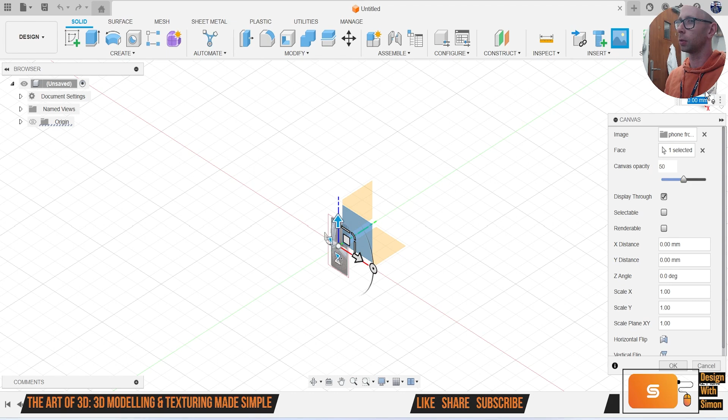First thing I'm going to do is bring in our reference images. If we click up to this button here that says Canvas, go to Insert from Computer, and on my desktop I've got my references. So I've got the front, looking on the front plane here, bring it into position. I'm not going to change sizes just yet, so I'm just going to bring it in and bring it up. Do the same again with the back, and then we'll do the same on the side.

Now what we want to do is make sure we've got those the right size, so I'm going to turn off those ones first. If I right click and calibrate, I click here to here, and I can put in what size it wants. All I've done is go on Google and typed in measurements, so I'm just going to put those in there. That needs to be 68mm.

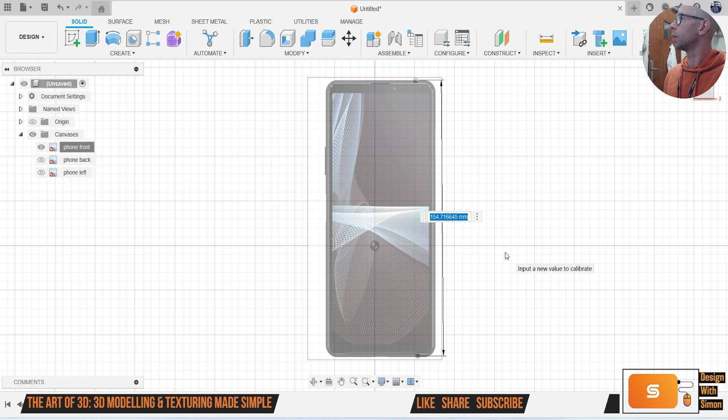And then same again, let's calibrate top and bottom, and that needs to be 156. Let's do the same on the side, so let's right click, calibrate. That's going to be 8mm thick, 8.4. So let's do 8.4. Enter.

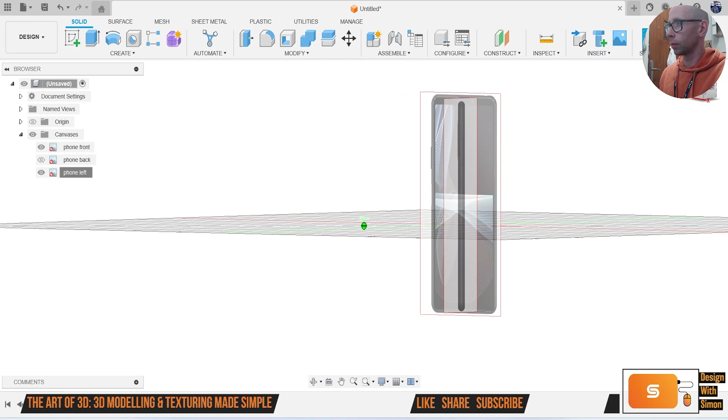And then bring that up into position. Let's right click, edit canvas, drag up. Let me change the height of that slightly, so let's right click, calibrate, top and bottom. Again that needs to be 156. And then we're going to bring this one up as well, and for this one, edit canvas, drag this one up to be exactly the same size.

Okay, so we've now got our canvases. I'm going to turn that one off for now. I'm going to give us a quick save.

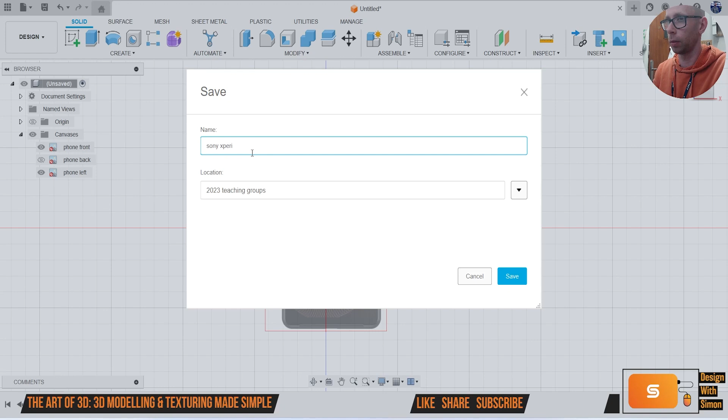Once I'm done with that, we're going to create a sketch on this front plane here, go to create and go to rectangle there, so we want a 2-point rectangle. Zoom in and just go to where that lines up, come down to the bottom, like that. Then finish sketch, hit E to extrude, or you can go to create and extrude there. So you see the keyboard shortcut E. Hit E, should highlight it. If it doesn't, you can just click on it like that, come to the side, and then we can drag that out.

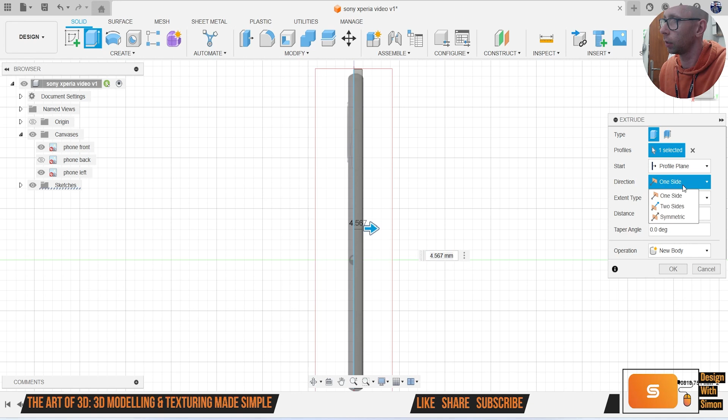And then let's do two-sided drag out like that, so we've now got our 3D rectangle. We're going to go to modify and fillet it, or keyboard shortcut F, and just grab these corners. If you hover over, I can actually see through those corners there. Come to the front again, just drag that in like that.

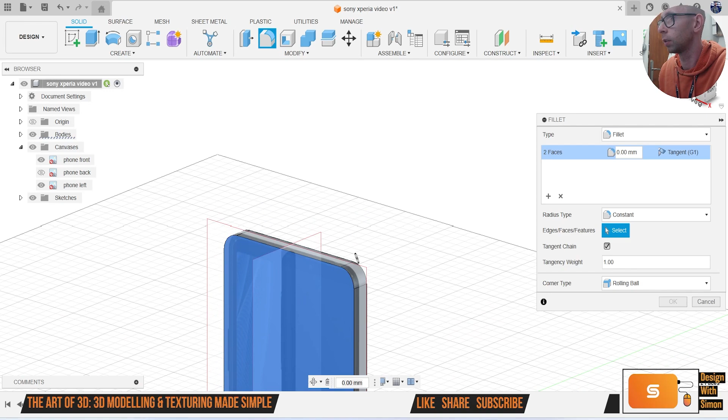And then let's fillet it. I'm going to grab that surface and that surface, then drag that in like that, just trying to keep in line with this bit here. Then enter. We've got the basic sort of shape done.

I'm going to turn off that side plane for now. So what I'm going to do is then start to put in these shapes, so we've got the little speaker section there. So let's turn the plane back on.

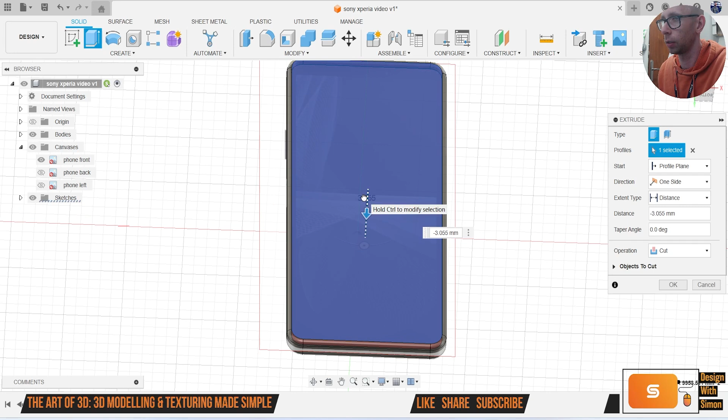Okay, first thing we're going to do though, let's hit E to extrude. I'm going to drag that down. Because when we texture it, we want to have another screen on the inside, so I'm going to click on that surface again, hit E, and I can drag up. But this time I'm going to go from join to new body. So now we've got two bodies there, so we've got the main body there, and this is the inside of our screen.

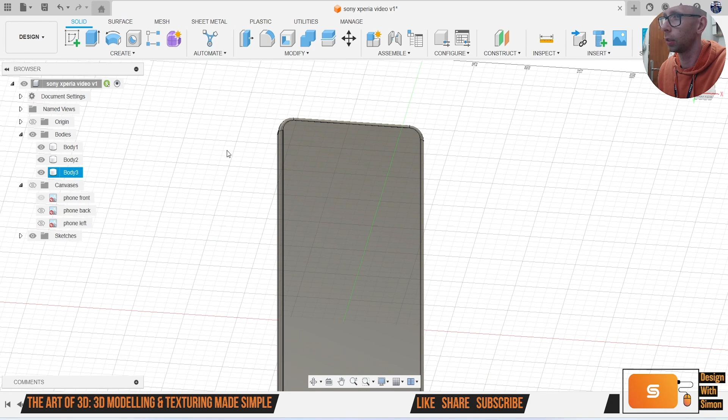I'm then going to do the same, hit E to extrude, and just drag up, zoom up until I get in line like that, and again go to new body. Now we've got three bodies. So I'll turn that off, you can have a look. We've got our main body there, and then we've got these two parts, because this will be where we put the actual image of the screen, and this will be our clear material, the actual texture of the screen as well. Let's now start putting some details in.

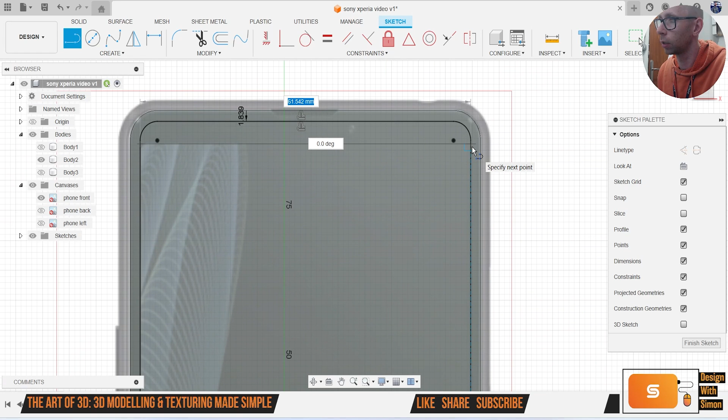We're going to turn that off and that off, so we're just working on the inside bit of the screen first of all. Let's create a sketch. I'm going to go to offset, select that and drag it in. Click OK, and I'm going to go arc line and just come straight across like that. Hit escape to get rid of the tool. T for trim, or modify and trim there. I'm going to trim these bits off. And I'm going to fillet it.

Now remember, fillet in sketching is slightly different to filleting when doing solid. So make sure you don't just hit F on your keyboard, because that'll finish your sketch and try and get you to fillet it as if it's a body, which we don't want.

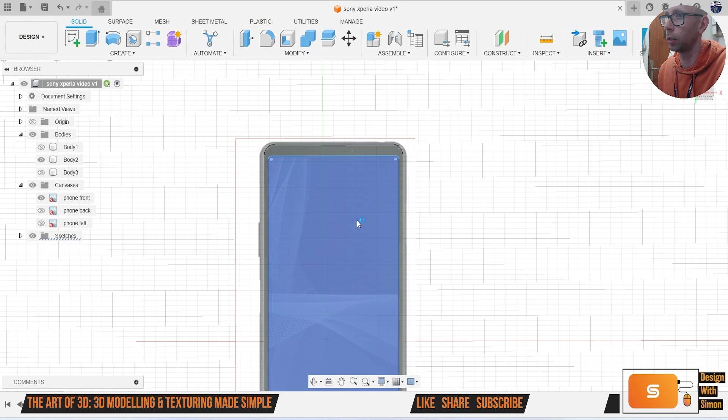Enter, finish sketch. So if we turn that off, and what we're going to do is cut that off. So you see, that's the inset bit where our screen is going to go.

And then we're going to get that back again. So we're going to grab that surface, hit E to extrude, and just click to there, but go to new body again. So now we've got the inside bit of our screen that's going to go on top of it, and then the outside case.

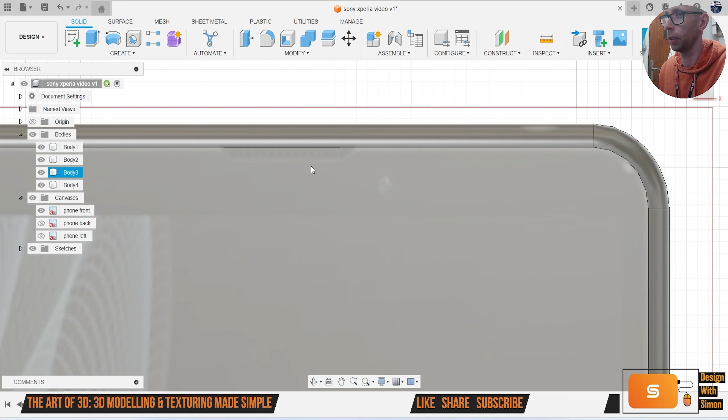So we've got all the different parts we need except for the buttons, and now we can start cutting some more details in. Let's start up here. Create a sketch, I'm going to click on the surface. Now remember, sketching will only let you start on a flat surface, so if you try and click on the filleted edges here, it won't work.

I'm going to hit L for line, come over to get in the middle. When that little triangle appears, I'm going to come down, and the reason why I'm doing that is just so I can mirror across, so I'm going to make sure it's symmetrical, which is what we want. Like that, and then I'm going to just put it just around these edges off slightly.

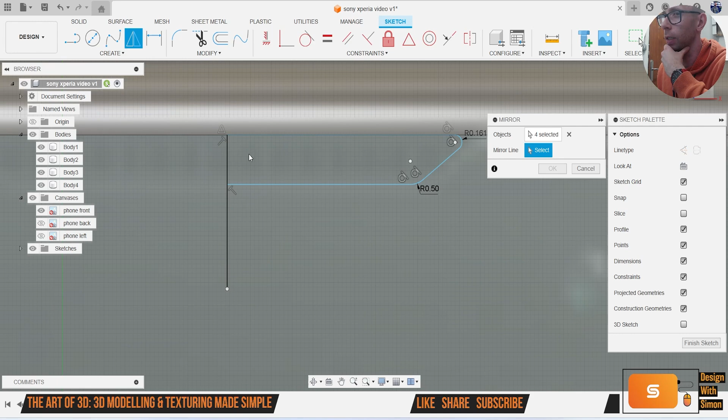Enter, and then we're going to mirror that across. Let's go to create and mirror, just double click. And then I'm going to deselect that line, because then I'm going to use that as the mirror line. Click OK.

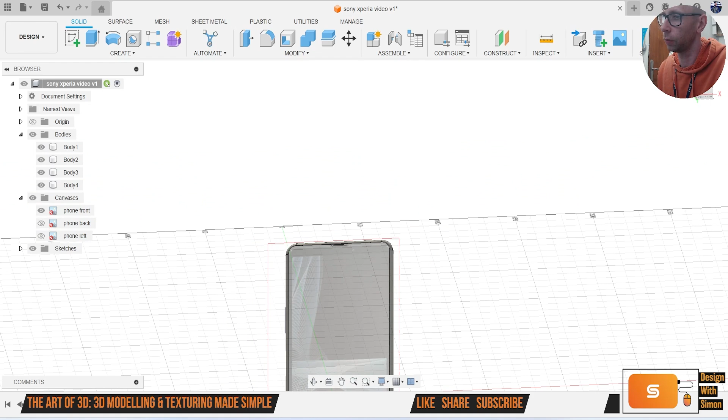So then I can hit E and grab that surface, I'm going to just drag it in, like that, and start to get some of those little details in. I'm going to hit F for fillet, so I can grab that, just 0.1 or something like that. But let's leave all the filleting to the end, so we're going to do everything, the details first, and then we'll fillet last.

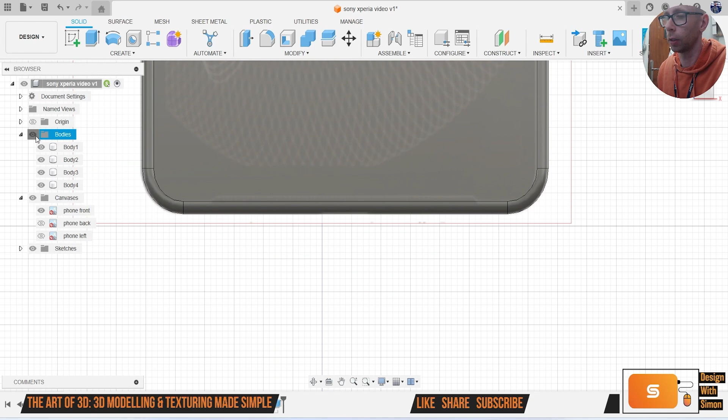Right, let's create sketch. I need a circle, go to create and circle there, I'm going to go center circle, and drag out, hit E for extrude. I'm going to turn that one off and just use that to cut through here like that. And then down at the bottom, turn this off, you see we've got this little detail here as well.

I'm going to create a sketch on the surface, and much like I did before, I'm going to hit L for line, find the middle, come up, now let's draw that across. Remember, if you've got a tool attached to your mouse and you can't get rid of it, just hit escape and it will get rid of it. And I'm just going to extend this line like that.

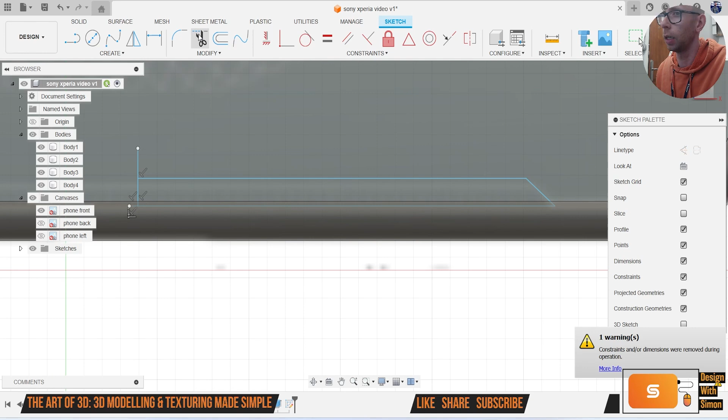Let's fillet those again, just so they're not really harsh lines. And then we're going to mirror that across, create mirror, we'll click line, like that. So again, you know it's a closed profile, we go over it in highlights, and hit E, select those profiles.

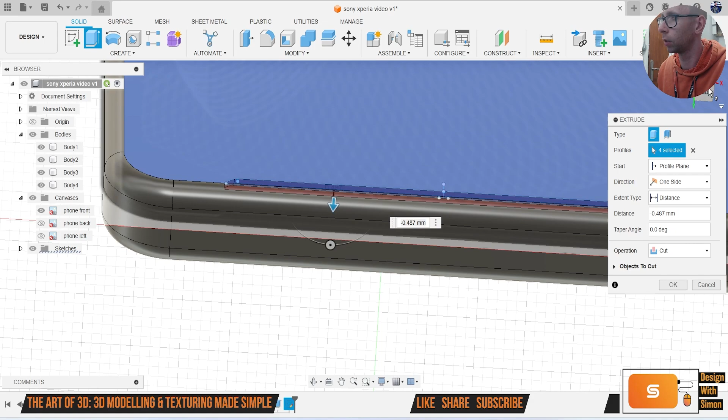Drag down. Just to make sure it goes all the way through, I'm going to do both ways. I'll just drag it up a little bit as well.

Okay, so that's most of the details on the front, because there isn't a huge amount to do on the front. So what we're going to do next, I'll make sure I've got these buttons on the right side. So we need to have, let me look at my image here.

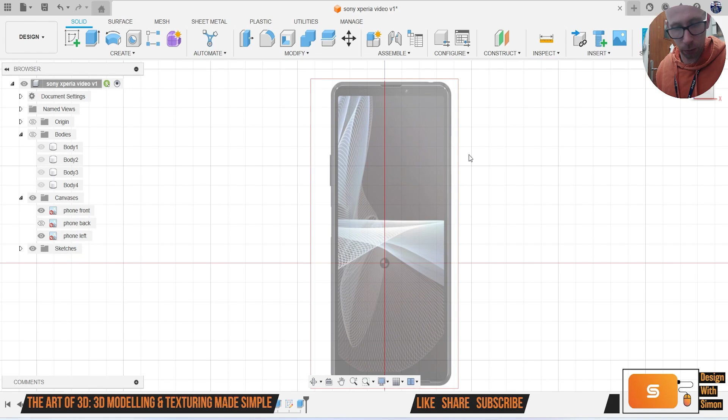Okay, so what we'll do is let's create an offset plane. So what we want to do is come here, click on offset plane, or construct offset plane, click on this plane here and just drag out, start sketch. I'm just turning off those bodies by clicking my eyeball just so I can see a bit clearer.

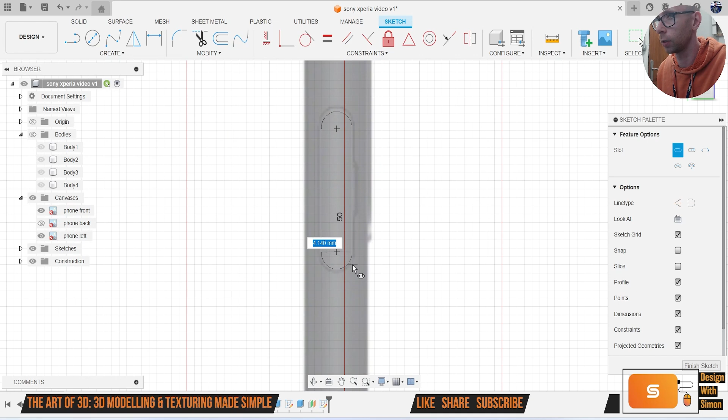And here I'm going to go to create, let's go to slot and center slot, just click and drag. And let's cut this little groove in as well. And let's mirror that across. In fact, first of all, let's just trim that bit. No, not yet, let's not do that just yet. Let's fillet this first.

Right, now let's mirror.

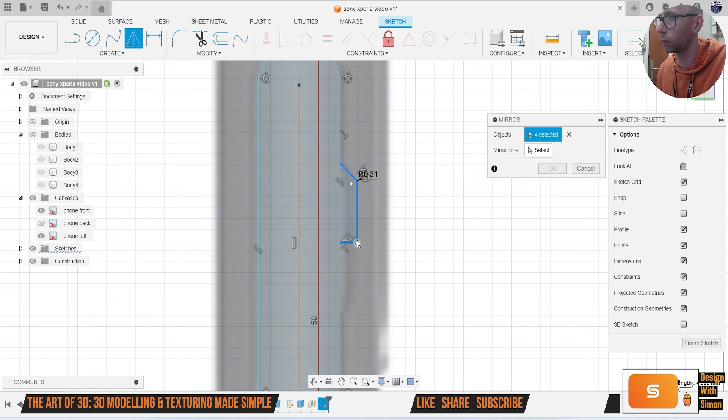Select that line, hit T on the keyboard for trim, and trim it away. Then I'm going to fillet just to soften those edges a little bit. Okay, so we've now got that done on this side.

I'm going to turn on those bodies again. Just sketch, and you see that sketch is hanging out over here. I'm going to hit E to extrude. Actually, before that, turn that off so we see what's going on. I'll turn off everything except the main body, then hit Control C, Control V so I've got an extra copy of it.

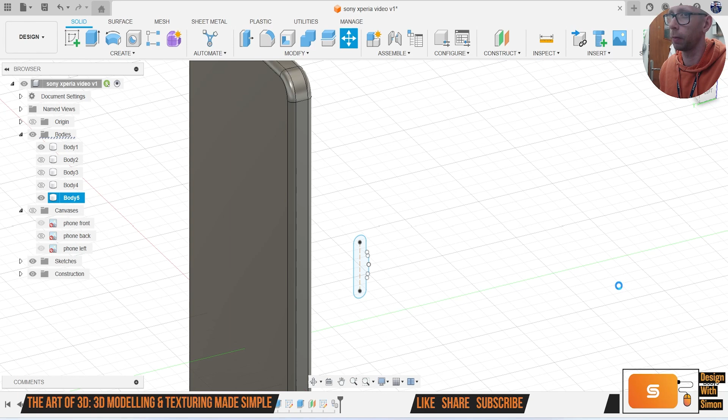Turn that off, hit E to extrude, take that and drag it through. It's going to start cutting, but under here it says cut, so you've got join, cut, intersect. If I go to intersect, it's going to leave me with that bit, so we could click OK with that instead.

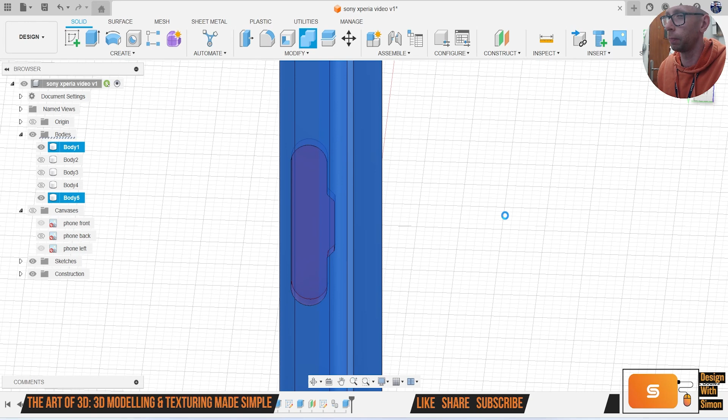Then if I turn back on this body here, I can go to combine, target body this body, tool body. I'll use that, say cut, but make sure you've got keep tool selected. So now it's cut that hole out and we've got that button.

So now what we should be able to do, hopefully, is add a little fillet onto that. I'm going to grab that and let's do like a 0.2. So we've now got that there.

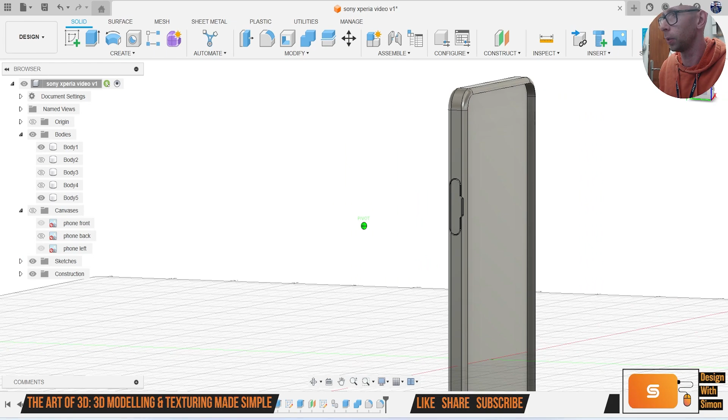Then on this side we do the same sort of thing, we've got a few different buttons, so things like the volume and screen capture or screenshot button or lock button. Now, annoyingly, because I haven't got both sides, I've got the left-hand side and not the right-hand side because I couldn't get it, but that's not a problem.

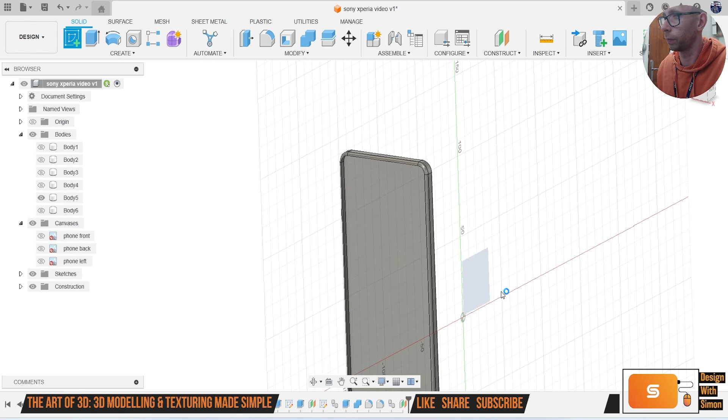Let's just bring this one back. Same thing, Control C, Control V, so we've got another copy of it, and just hide one. Offset plane again, and drag out a little bit. Create sketch, and we'll do the same sort of thing. So we've got...

It doesn't matter if we're not exact with everything, but we're going to create a slot, center to center slot. One thing we can do, I'm going to hit escape so I can hit P for project. If I select this one, bodies, select the whole thing, turn the body off, you see it's done an outline so you can see where it's going a bit better. Now that I've done that, let's go to slot, center slot.

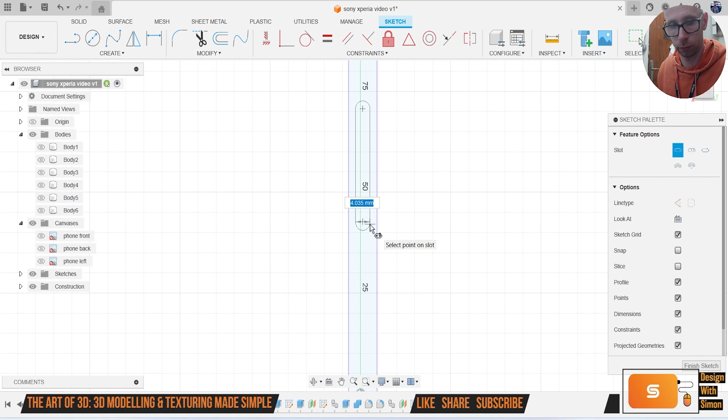And then let's add in a couple of these little details. Just make sure we're in the center. Well actually, let's make that a bit shorter. Right click and you can repeat your last command.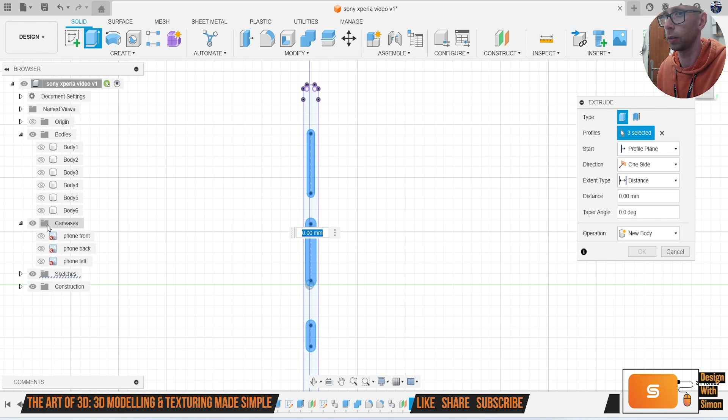Okay, finish sketch. Hit E and I can just grab these profiles, turn on that body, and again I'm going to drag through. And again, let's go to intersect. We'll just drag it like that.

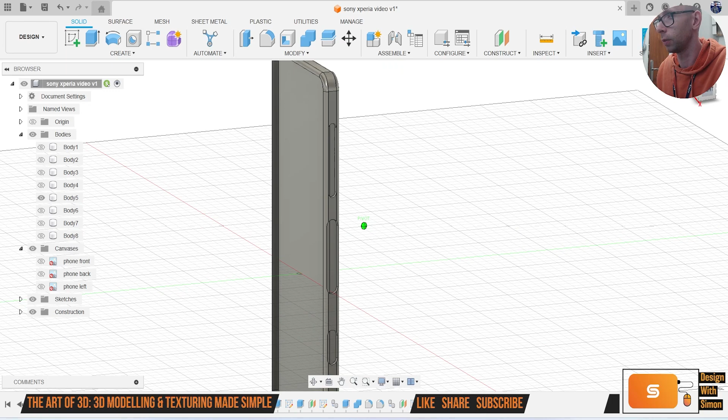And then we can bring back the main body. Sorry, combine again, target body this one, tool body, grab these three, cut and keep tools. Then if we turn those off, you can see that we've got those little details cut in.

And then let's fillet these. Hold control and you can do multiple fillets at the same time. Let's try a bit bigger. How's that look? Like .3, okay, goes back, fillet. I'm using the keyboard shortcut F to do that.

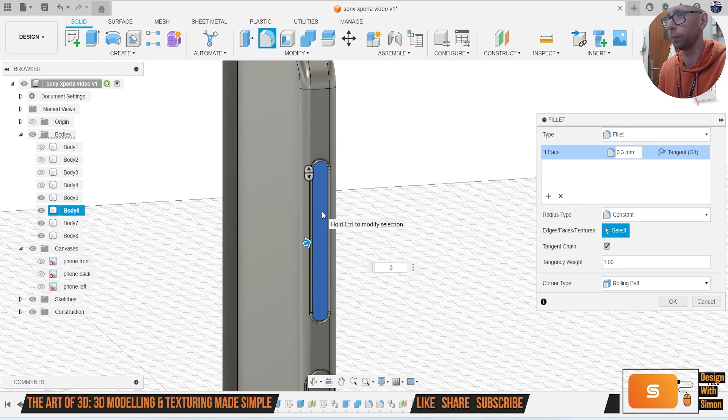Okay, and this one here, what we're going to do is create a sketch. Hit L for line and just find the middle, because this is the volume one. I'll hit escape and hit L again and come to the middle where it does a little triangle, like that. I'm going to do R for rectangle, center rectangle, just draw out, and then trim.

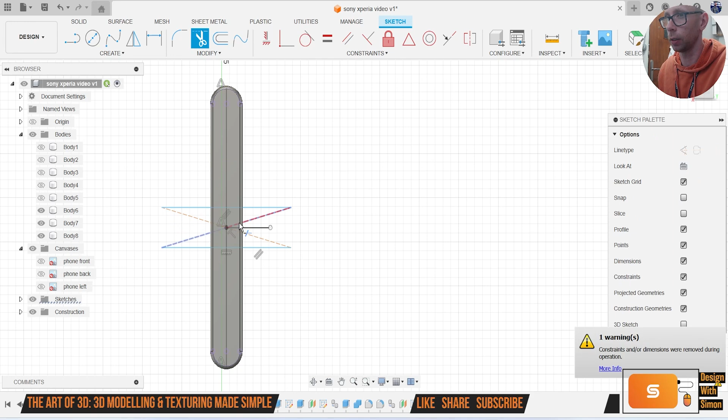The whole point of doing this is just so I can get those two lines, because what I'm going to do is split body, select those two, and I can just remove that bit. F for fillet, and that was a 0.3.

Right click and remove that one. So now we've got the volume section there. And then just having a look... okay.

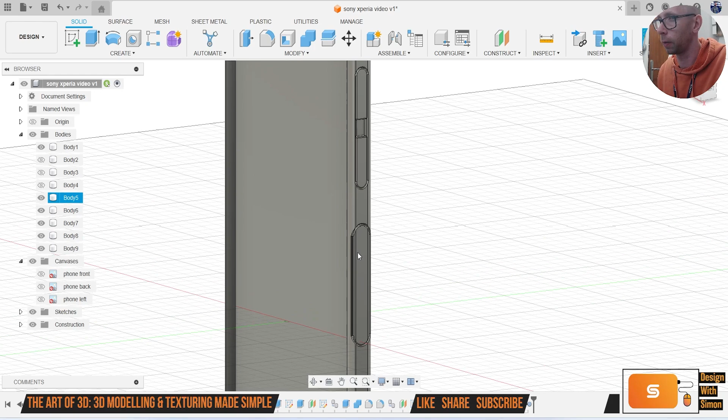So really, the last thing to do now, bring those back, is the camera at the back. I'm going to take my phone out of the case so I can have a proper look at it, but I've got reference images as well. So we just want, I don't know if I can see on the camera, put those there. Let's bring our back reference image.

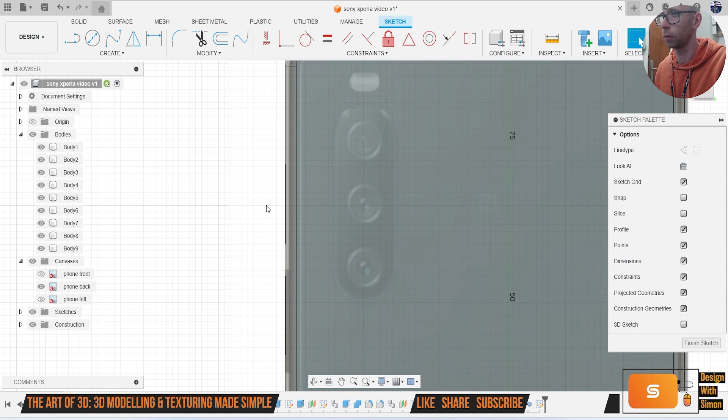And what we're going to do is create a sketch. Again, let's use that slot, center to center slot. Drag, it's a bit off again. Yep, something like that. Hit E. Now it doesn't come out very far.

Let's just drag it out a little bit. Let's do like... probably too much, hit 5. I'm going to go to new body. And then let's draw those lenses. I'm going to do C for circle, make sure I find the middle.

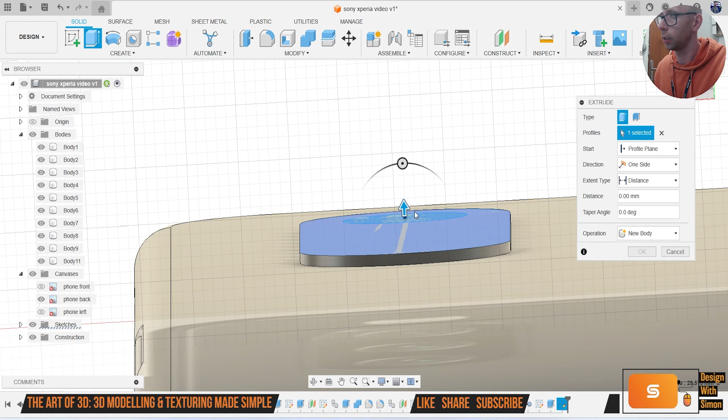E to extrude. So once you find that you're using the keyboard shortcuts a bit more, you find that it goes a little quicker. I'm actually going to turn off that body now so it doesn't get in the way. Drag it out. In fact, I'll right click and isolate just so that's the only one we're working on.

We're going to create a sketch, grab that surface, E to extrude, just drag that all the way down, but make it a new body. And then I'm going to fillet this as we're going along. Let's do like a 0.2, and start to get that separation.

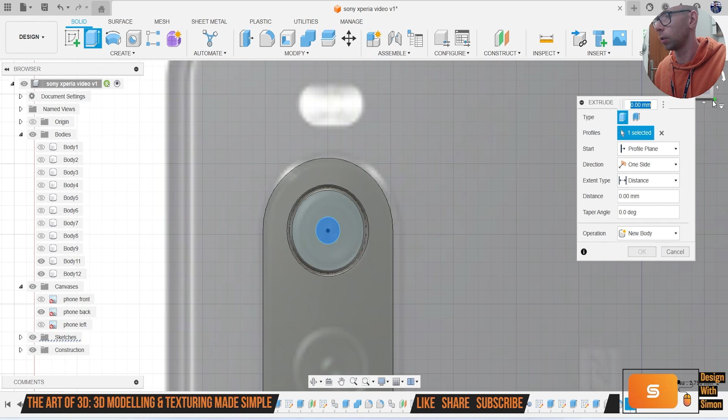And then we'll do one more circle and come into the middle. Start a sketch and then come to circle. E to extrude, drag that down, much like I did before. Create a sketch, finish sketch, just so I can hit E to extrude and grab that circle there. Rotate it around, just go to the back. Again, make sure it's a new body.

Fillet, we did 0.2. Fillet, 0.2. Okay, so we've now got our lenses, and what we want to do - hopefully this will work, but it doesn't always work - let's go to create pattern and rectangular pattern.

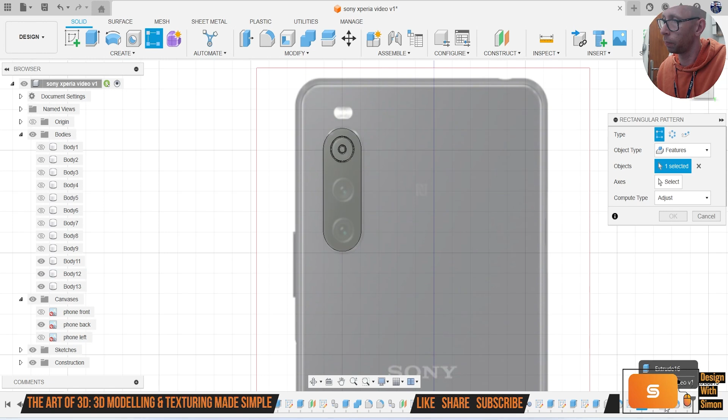Change up the features and let's grab these features. I'll grab this here. Okay, we want some more of those features. We probably want - drag that down - we don't want that one. We want these as well.

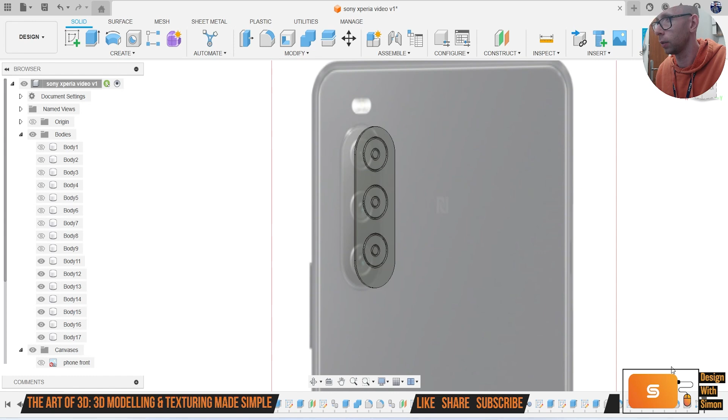Now it doesn't line up quite right, so we can go back and edit that feature and just drag it down a bit more. Click OK. And rather than have to do that three separate times, I turn my canvas off. Then it'll individually roll for us, which is exactly what we want. Hit F for fillet, and let's do like a 0.2 again. So we've now got our camera.

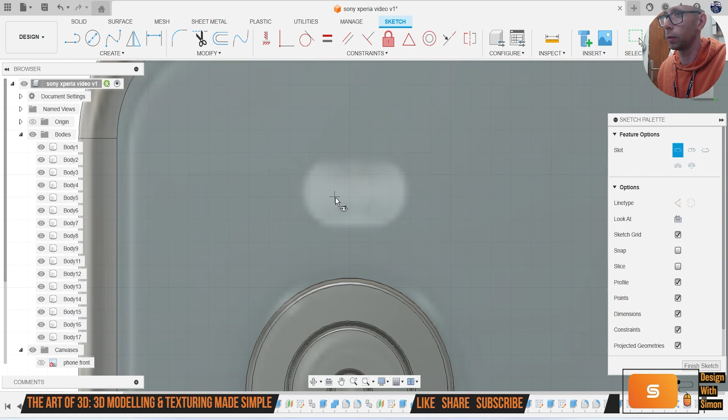We then want our flash, which is quite a simple one. So we're going to sketch on this back part here. Just here, create, and let's go for a slot as well. Drag across, hit E to extrude, just drag that in a little bit.

I'm then going to hit E to extrude, come back up, go to new body, fillet that edge, fillet. There we go. So those details are done.

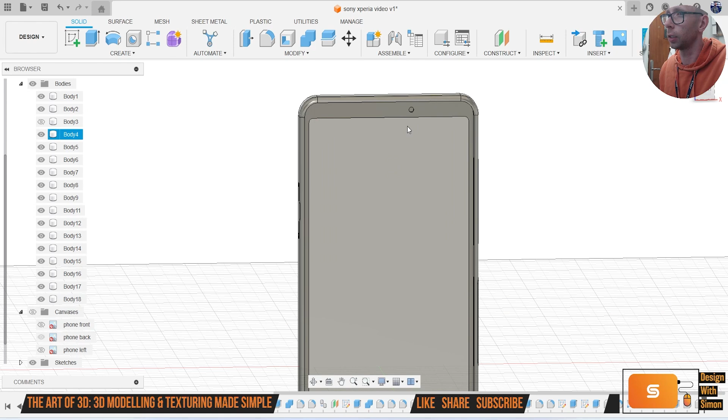So let's just turn the canvas off. So we've got everything on the front, remembering that underneath we've got - hide that one - we've got our details of our screen that you'll then be able to see. We will fillet all the edges; I need to make sure I don't forget to do that. I do want to make sure as well we do things like the jack and the charging port.

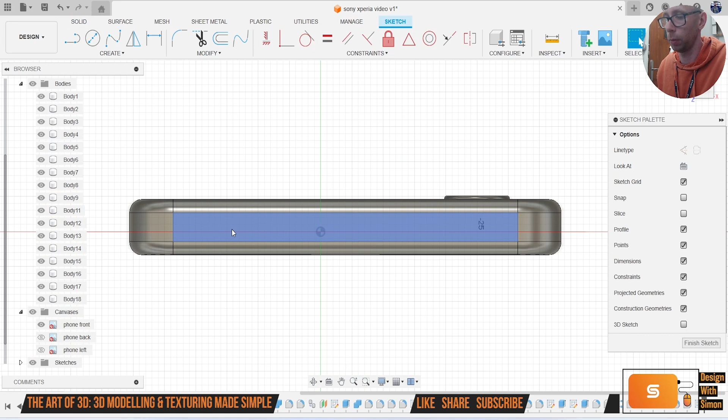So let's turn canvas on. So if I turn all the bodies off, it is on this side because I need to have it mirrored over. Yeah, so I'm going to create a sketch on that plane. Remember, you need a flat plane to be able to do it. And hit C for circle, right in the middle, and it comes out something like that.

And hit E to extrude, drag that down like that. Turn that canvas off - canvases can get in the way a little bit sometimes. Going to hit F for fillet.

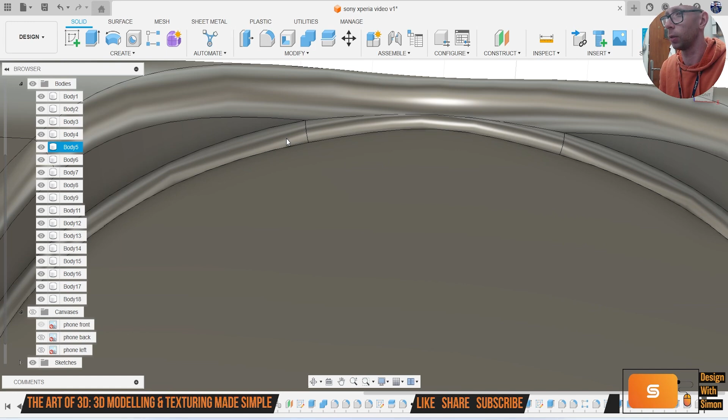You will find as well sometimes that your fillets don't always work. Tends to be so - the reason that one didn't work, I'm assuming, is because it would have broken that surface. So this one might not... oh no, it did work. Okay, and then if you look at that, create a sketch, circle.

E to extrude. Let's drag that down. So we've got that, and then down at the bottom we've then got another slot, which is essentially where our charging port is.

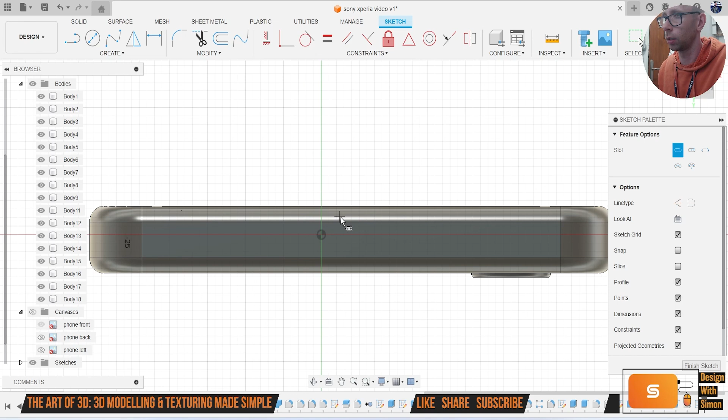So let's create a sketch, create, let's go to slot again, center slot, and middle, then we can come down. In fact, what we're going to do is use P for project to grab that whole body, L for line, so we can find the middle perfectly. Come up, L for line, so we can find that middle perfectly, like that, so that crosses directly in the middle.

And let's do the slot. So, not a massive one, just something. Something best - let's trim that off, and let's call that 4. And then what we'll do is slot, center slot. Well, just do that to 8. Come out.

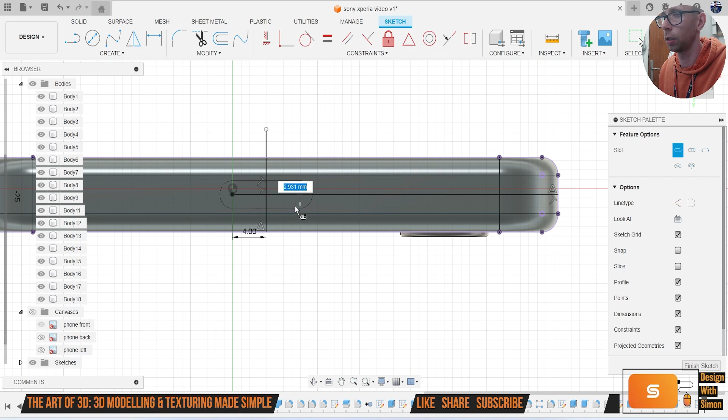E to extrude, drag up, F for fillet. And then let's hit E to extrude, drag that down a bit more. A little bit too much - let's bring that back a little bit.

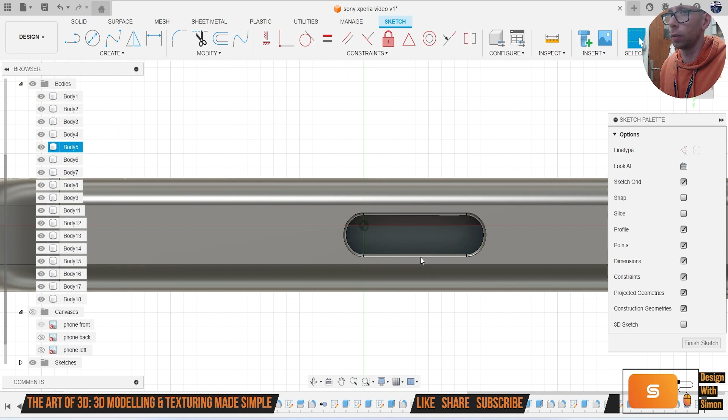And then let's just... let's delete that one. So delete, create sketch. L for line to find the middle. R for rectangle, and grab center rectangle.

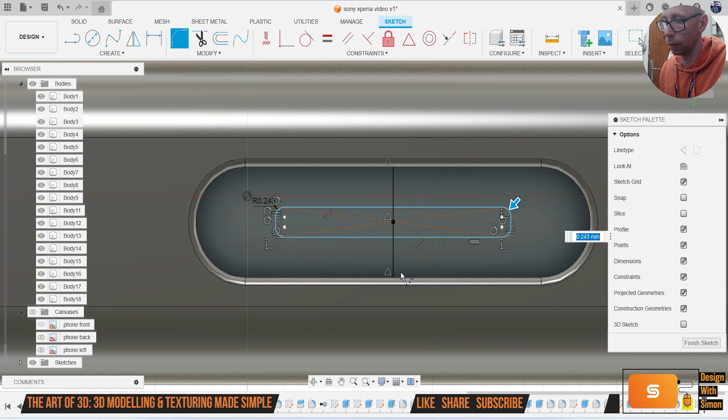Fillet all these sides. I hit E, drag that up, and I'm going to change that to new body.

Hit F for fillet, do like a 0.2, 2, like that. The modeling side of things is done. So the last thing to do before we start texturing it is go around and add some fillets to edges to make it a bit more rounded, because in reality nothing should have that really sharp sort of edge to it. So let's go to F, fillet.

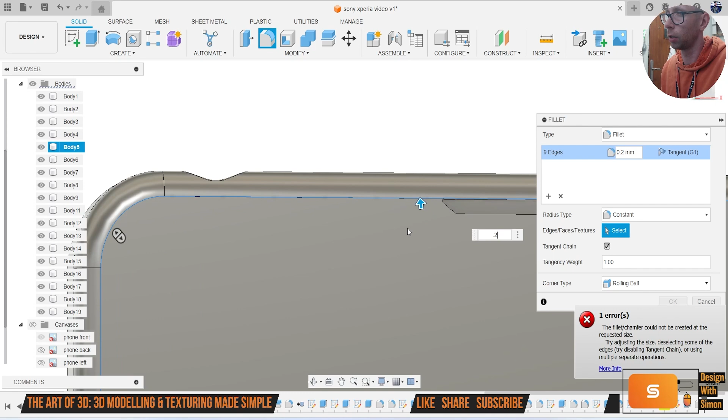And if you hold down control, it'll let you do multiple fillets like that. Just making sure we're going all the way around.

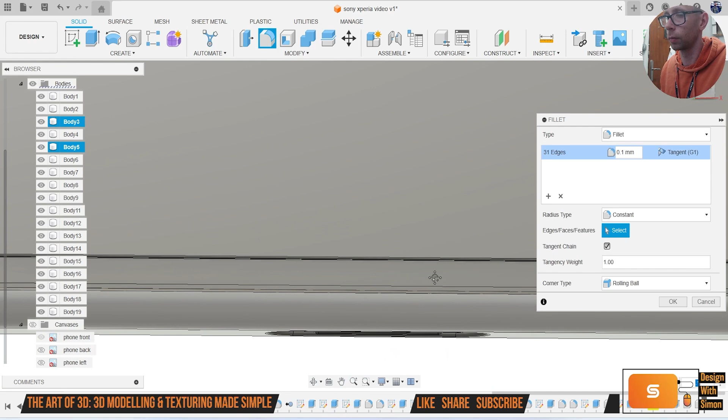That bit is done, so I'm going to take that away. I think we'll just fillet this slightly as well.

Again, you can quickly just hit F on your keyboard for fillet. With these fillets, I'm not being specific with what it needs to be, just what I think looks right. Don't worry if your fillet ends up being a slightly different size.

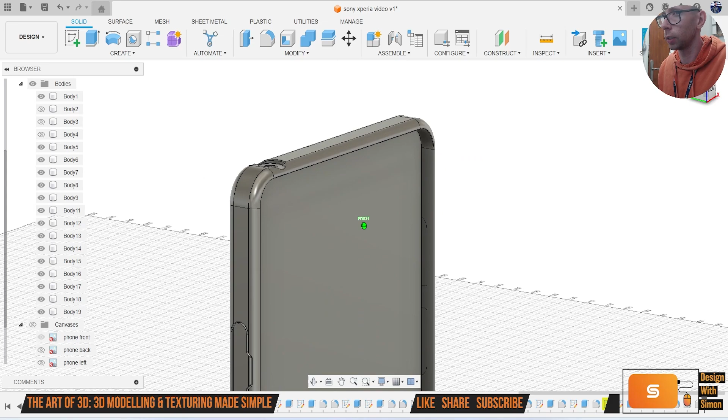That is fine. I'm just turning off these bodies when I'm done with them, so I can check fillets everywhere else. And I'm pretty sure I did it everywhere else as I was going, because these have all got fillets. So if I bring everything back, right.

Before we go on to texturing it, which we're going to jump into Blender to do, all I've made sure of is that every part I want to texture is a different body. That's the key thing here, and then I've got those fillets on there as well, because when we want to texture it, it makes it a lot easier to assign materials to those different bodies. Which is why when you go into extrude and it has join, make sure you change it to new body.

So the last thing I'm going to do is give this a quick save, click OK, and then go to File, Export, change that to FBX, and leave it on my desktop so I can find it easily. Then click on Save and Export.

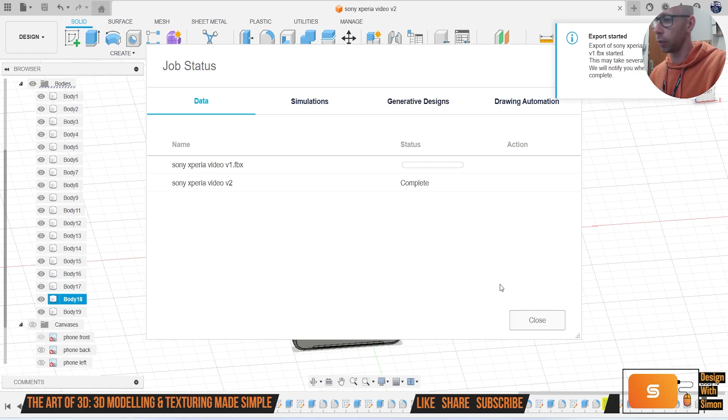So what I'm then going to do is jump over to Blender to have a go at texturing it. Okay, so we're in Blender. First thing I'm going to do is hit A to select everything and X to delete.

And we're going to bring in our phone. We're going to File, Import, FBX, and then on the desktop we've got our phone we just modelled. I'm zooming because it's all the way down here. Now it looks tiny, but we've done it to scale.

So if we go Shift A and add that cube back in - just so you know, this cube is a meter cube, so meter by meter by meter - I'm going to hit delete to get rid of that. So we have got the right measurements, it's just quite small compared to everything else.

I'm going to select all, we want to rotate it, so if I hit R on my keyboard, I'm going to start rotating it randomly, but we want to lock it in place. If you look here, we've got X, Y, and Z - Z up and down, X left/right, Y backwards and forwards. I'm going to hit X to lock it in place, and I can type in exact measurements.

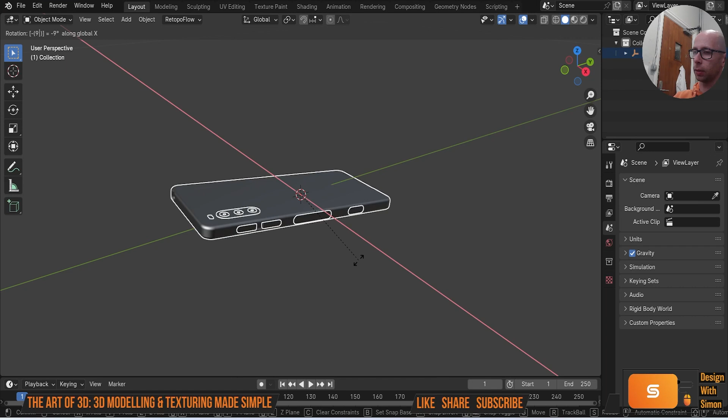I type in 90 and hit enter, but it's brought in upside down. So what I'm going to do is R for rotate, X, then minus 90 on the keyboard, and that's brought it in right around. Select all again, hit G so I can move it around, hit Z to lock it in place, and then lock it in like that.

So I'm going to start adding in materials. For that I've got Blender Kit. There's a couple of add-ons I'm going to use, so I go to preferences. The key ones I use are also Image as Decal, which is a free one you can download, so I'll put the link in the description.

Tri lighting, which is built into Blender, but you need to install it, so just search for tri lighting and click on the tick. And Blender Kit is the other one, because that's what's got all the material library on it. It's going to go up here, Blender Kit, and I'm going to type in plastic - we want like a plastic base.

I'm going to drag that on like this. At the minute, very little has changed other than it's removed the materials, because interestingly, Blender does recognize the fact that Fusion has applied materials to it.

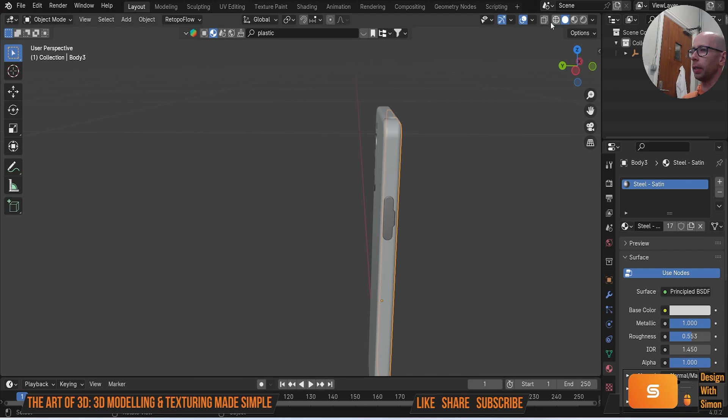It doesn't know what to do with those materials, so it has that default satin steel look. Up here you've got wireframe mode, clay render, material preview, and rendering. That one won't do anything now because we've got no lighting built in, so just go to material preview to start seeing what it's going to look like.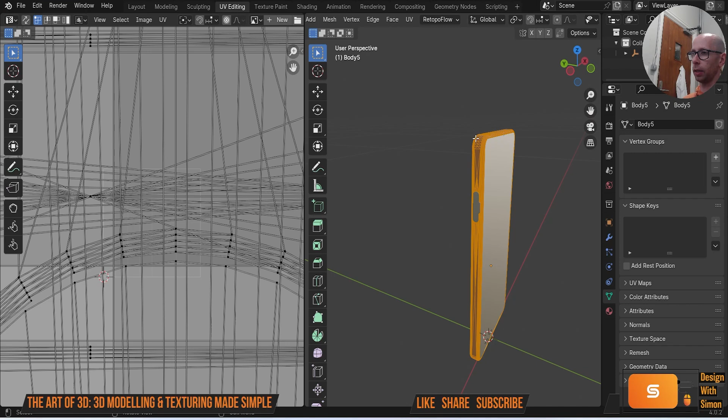The other thing with texturing in Blender from Fusion is that we need to unwrap our model. That's called UV unwrapping, which means telling Blender how you want the material to wrap around the object. To do that, go up to UV editing and you get two split windows. Hit Tab to select the thing I want to unwrap, then Tab again selects everything, like the faces. I'll press 3 to select faces, hit A to select it all, zoom out, and it's sort of unwrapped it for me.

Now there's a few different kinds of unwrapping you can do. Go to UV here, you can go to Smart Project, click OK, and if you zoom in you see it's essentially trying to make each part individual. Or in this case you could go to Cube Projection. You've got loads of other ones too, like cylindrical, spherical, and so on.

What I suggest you do is right click and go to Add to Quick Favorites, because if I go to Layout now, I don't need to go back into UV - I can just hit Tab and select, or hit Q, and I've got it there already.

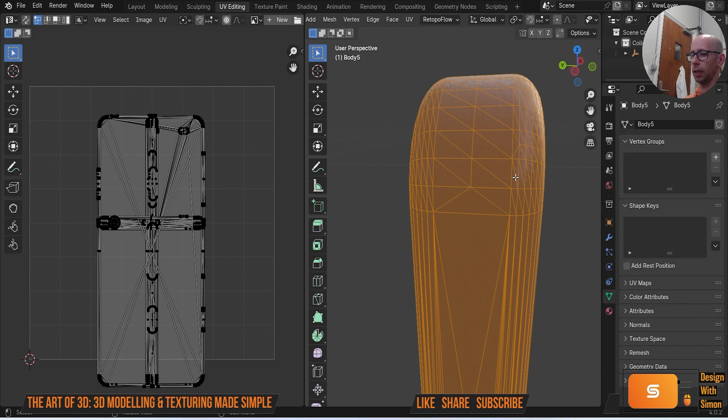The only thing you might need to do - if you go to UV Editing and zoom in, you see we've got that graininess of the plastic. What I can do is hit Tab, select it all, hit Scale. It's quite hard to see, but if I drag it up, the graininess becomes a lot finer. So you can just play around with that.

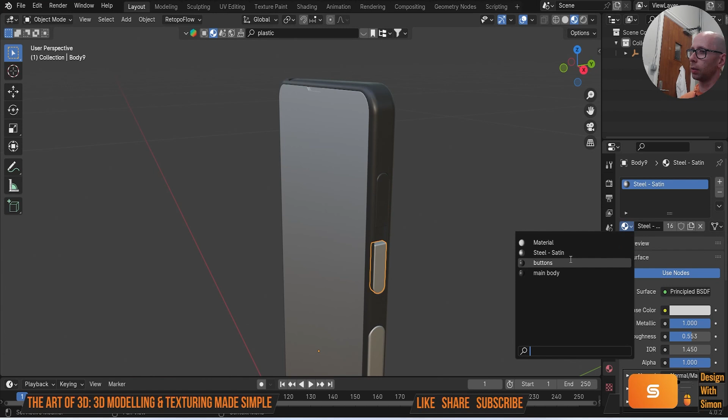Until you're happy, and then I'm going to start adding materials to it. So we've got this - I'm going to double click on it, let's call that 'main body.' I'm then going to start selecting our buttons, and I'm going to set that as main body too. But if I click on this one here, I can duplicate it, let's call that 'buttons,' and I can just work my way around applying buttons.

Like that - so very quickly we can start to add those materials in quite easily. Now with this one, I tried to find the best sort of material, like a light bulb. Obviously didn't have anything like that, but I found this glitter gel seemed to look close to what we wanted. I started to drag that on so you see what it looks like.

Like that. And then what I'm actually going to do is grab that screen and hit H to hide it so we've got the underneath part - this is where we've got the actual screen to be.

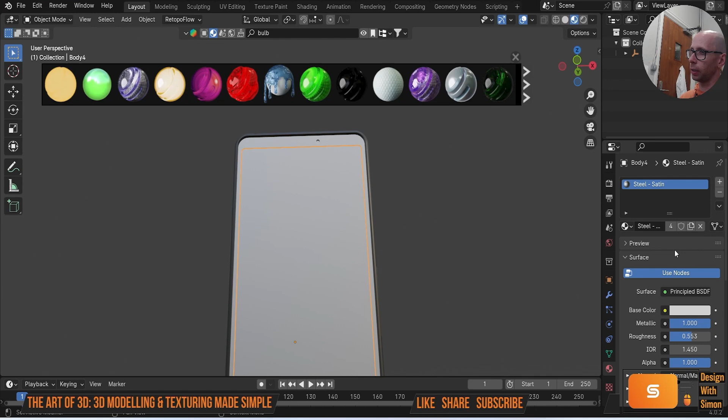So on materials here, I'm going to click on this X to get rid of it, add a new one, and under base color here I'm going to go to image texture. I'm going to open, and on my desktop I have what I want as the image.

Now at the minute it needs to unwrap it, so I'm going to select it, hit Tab, Q, and Cube Projection. I'll go back over to UV - I want it to be that full size, so I'll hit A and S. Let me rotate it so you can see what's going to happen - keep an eye on this side here. I'll hit S and drag, like that, so that's now projected onto there.

And then I also want to make it glow, like light up. So go on Emissive, do the same thing, go to image texture, and I can just use that image. Then how bright do you want it to be? Let's do like 1, so it lights up. So we've now got our image on there.

The inside bit we want like a glossy plastic - let's do plastic glossy, and we'll take this yellow because we can change the color. For the shading I'm going to change a lot of this - view, area, close, view, area, close, so I've got these two. Then view, I'll change up to viewport, zoom in, put our material preview back on, and then I want to change this from yellow to black.

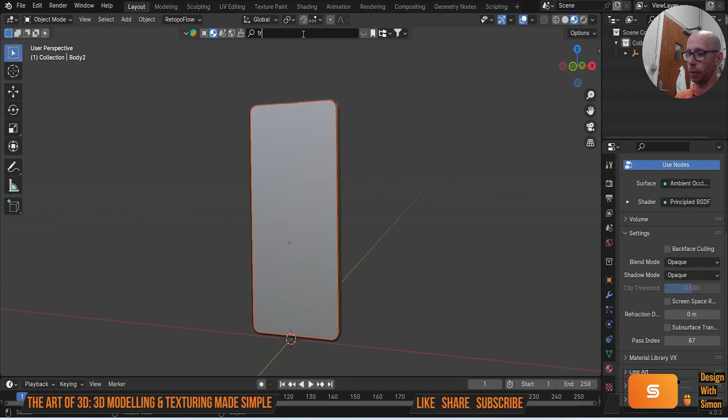So this is what materials look like behind the curtain of how materials are actually made. So base color, I'm going to change this to black. Last thing is Alt H to unhide, and then this one we want a transparent material. Let's take this transparent glass, and very easily we'll apply materials to our thing.

Last thing we want is to add some decals on there, which is why I use that image as decal add-on. So I'm going to click on the body, go Shift A, image as decal. On my desktop, I've got a couple of decals, which are currently massive.

Let's do R to rotate, Z, and do 90. Now it's huge, so I'm going to hit S to scale and bring it down. G and Z to bring it up. G, Y to bring it out. Scale to bring it down.

Now, I don't know what this key is called, the one above Tab and to the left of the number 1 on the keyboard. If you click that, it'll bring up this little widget. I'm going to come to the back just so I can move this into position, make it a bit smaller and rotate it. So rotate R, Y, 180. Like that. And then let's bring in the Xperia logo as well.

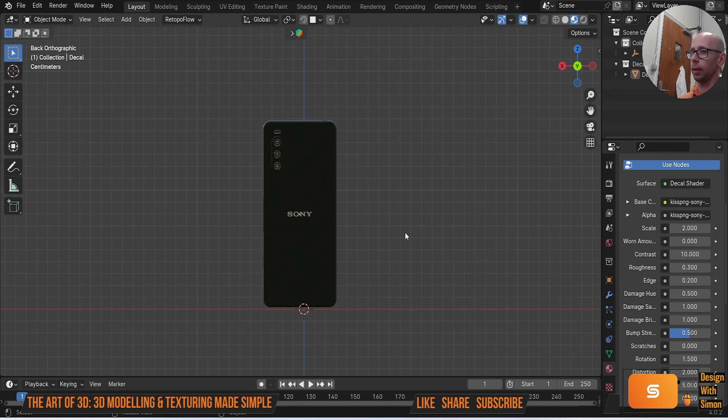So Shift A, image as decal. I've now got the Xperia logo as well. Same thing: R, Z, 90. Scale, bring it down. G, Z, G, Y. Bring that into position. Maybe scale it down a little bit more, like that. So we've got the actual texturing side of things done.

So now we just want to present it a bit nicer. I'm going to do a quick save so I don't lose it, since I'm going to save over the version that crashed before as I was doing it.

So I'm going to bring this up with G, Z, and then Shift duplicate it, hit Y to move it along like that. I'm just going to G, X to move it, then G, Z to move it into position. And then this one here, rotate Z 180, so you can see we've got front and back to show it off.

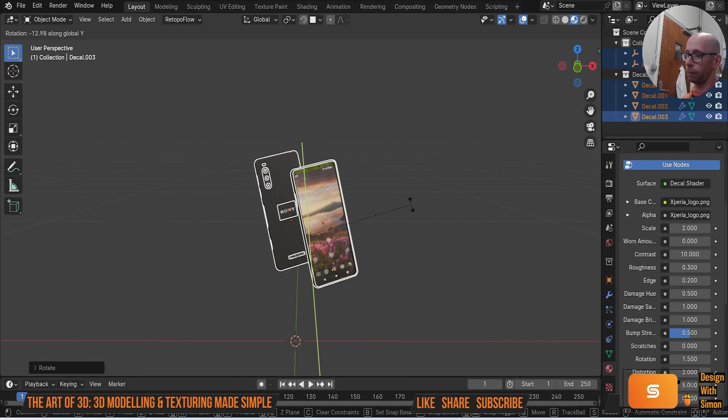Bring this up, G, Z, let's rotate it a little bit just to make it a bit more interesting to look at. Something like that. We're just going to add a little background to it.

So Shift A, get to mesh, and let's go to cylinder, which is now massive. Let's just scale it down. And then what we're going to do is S, but I'll do Shift Z to avoid making it taller. Like that. I'm going to go to the top view just to try and make sure I've got it in the middle as much as possible.

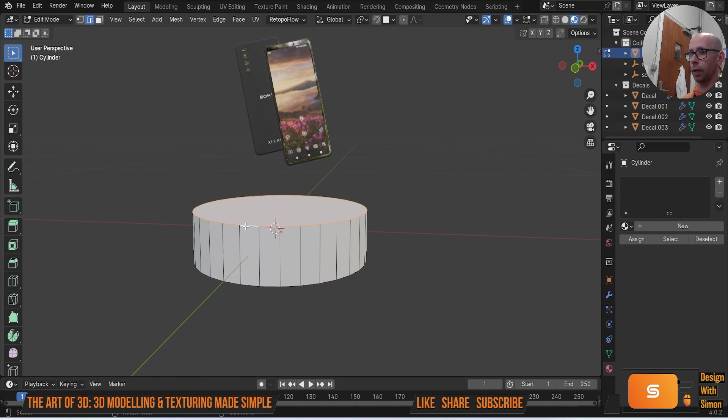A bit too big. I'm going to hit Tab to go to edit mode, grab that face, hit X and delete face. Then go to 2 for edge mode, or come up here. Hold down Alt and click on the edge, Control B to bevel it, add a bit of a bevel just to round it off. Okay, before we do that, I'm just going to undo, then go to Alt, Control A, and apply all transformations.

And then let's go to modifiers, generate subsurface modifier, edit, Control B. Something like that, and hit Q, shade smooth. Now shade smooth is on my quick menu, which I've added as well, like that. But if you go to object and shade smooth, it's there too.

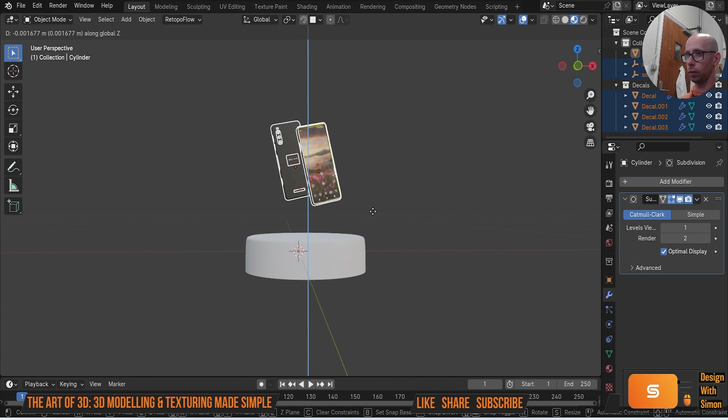Let's just bring that down, G, Z, something like that. Give this a quick save. And then we want to add a generic background to it. So I'm going to go Shift A, go to plane, and then make that a bit smaller, I think. Let's make it like that.

And then what I tend to do: edit mode, go to edge, grab those edges there, E to extrude, Z to lock it in place, like that. And then grab those edges, Control B to bevel, and make a bit of a bevel.

Just like that, and then let's go shade smooth as well. And then we want to add just not like a generic sort of neutral color.

So what I'm going to do is make a material for that. I'm going to just have it saving every once in a while. I'm going to go to shading so we see what's going on. Now I've got a node that I use just to add materials in, but we want to get it up. I've got it up there already, so basically I just use it so I can add a bit of noise, so it's not like a flat background basically. So I'll build that with you as we're doing it.

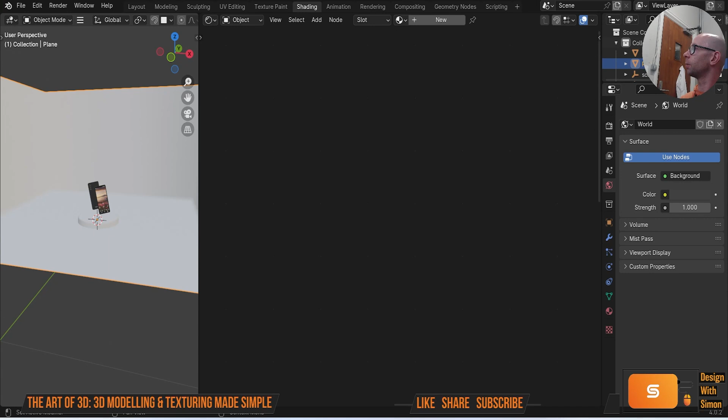So I'm going to add a new material. And then what we're going to do is go Shift A, and let's type in color, but spelled wrong because it's American - color ramp in, Shift A, mix, plug that into there. Shift A, noise, I'm going to put that into B. You see noise essentially is like loads and loads of dots, so what I tend to do is try and make that quite fine, just stops it being a completely flat background. A gradient as well, and that's why the mix is there, so we can mix it together.

You see what's going on there, but we just want to make sure we've got a bit more control over that. So let's go to mapping, put vector into vector, Shift A, texture coordinates, let's go to UV. Like that, so we can change that to say - zoom in so I can see a bit more. Circle, so I'll see what's going on.

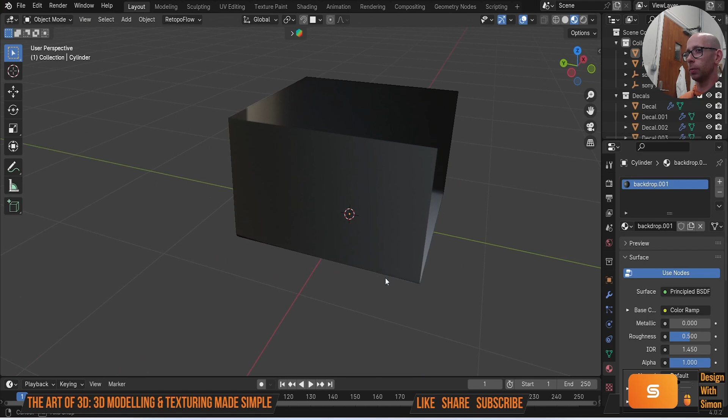And now what we're going to do is add some lighting to it. So we've got like a little photo booth basically, this is how I'm going to do it. Shift A, let's add an empty and add a cube. That's huge, so let's press S to scale, bring it down, G to bring it up. Now the whole reason why we add this is just so we've got something for the light to point at. So I'm going to go Shift A, light, 3-point lighting.

And then you can change how much power you want those lights to do. We turn on render mode now, you start to see. So at the minute you can't see anything because it's so dark, we start to up those numbers a little bit. See what's happening, so just go play around a little bit with the lights. Some of this will just be trial and error of just how much you want to have.

Just find a nice position to show off our work. Sometimes what's quite nice to do is add a bit of colour to the lights as well. Something kind of like that.

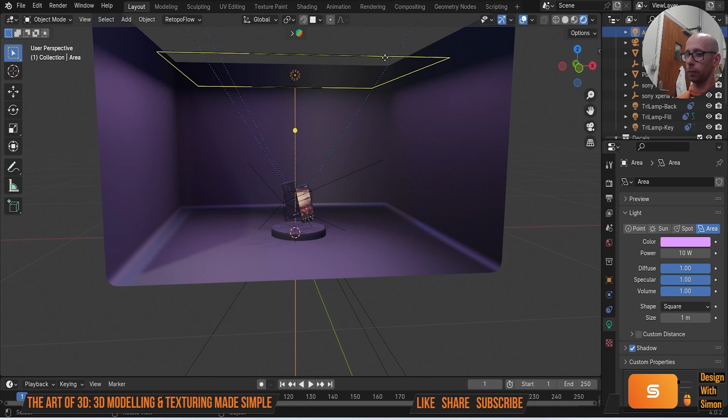Sometimes what can be good as well is if you go Shift A, light, an area light, GZ, bring it up, let's see. So you could, for example, do that - if you want to, do like one big area light like that. If you want to, but what you can do as well is take that, scale it down, bring it down, rotate, and use that to sort of point at the backdrop a little bit.

Shift D might make another one of those, so it just starts to light up, and that will make that a bit less powerful. Bring those up, rotate like that. So maybe we don't want those in, but just something like that. There's loads of different variations you can play around with lighting however you want.

Let's do something like that. And then for render settings, for this I'm just going to use Eevee because it's quite quick. Go to render image, and then very easily, very quickly, you've got some nice quality presentation of your future models.